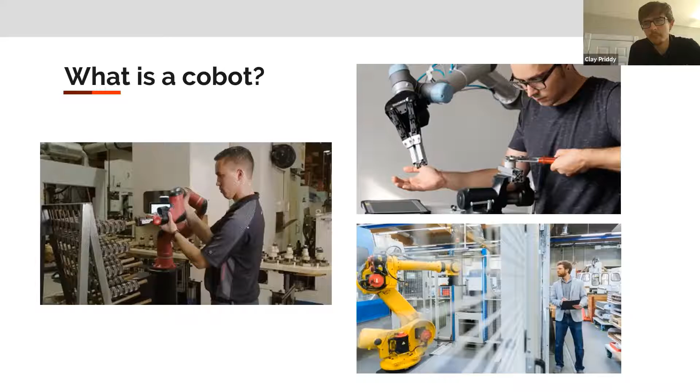The overall goal for our project is to help prepare the workforce in Kentucky to embrace this new technology. Other top universities in the United States have been doing research on collaborative robots, and we are hoping to bring this field of research to Western.

Our project is part of a larger collaborative robotics lab that will be in the Center for Energy Systems here at Western. This will allow our project to be used for research and education once we are finished with it. Additionally, our project is part of the NSF EPSCoR grant, and we are partnered with several other universities in Kentucky, united under the same goal of preparing the future workforce of Kentucky to use this new technology in the manufacturing industry.

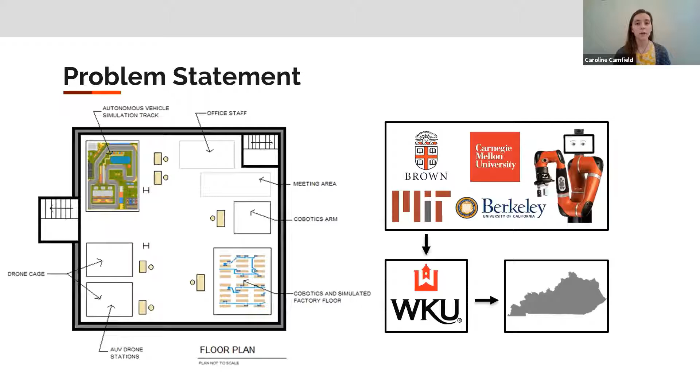The approach for this semester was a three-way path that were all parallel to each other. We wanted to do simulation, research, and robotic selection and purchase. This semester, with the current pandemic that is occurring, we have had to delay the purchase of the robot, and therefore we'll push it back to our next semester part of our project. We have completed all of our simulation and research up until this point, and next semester we will be developing perception as well as developing educational modules to teach the future workforce of Kentucky.

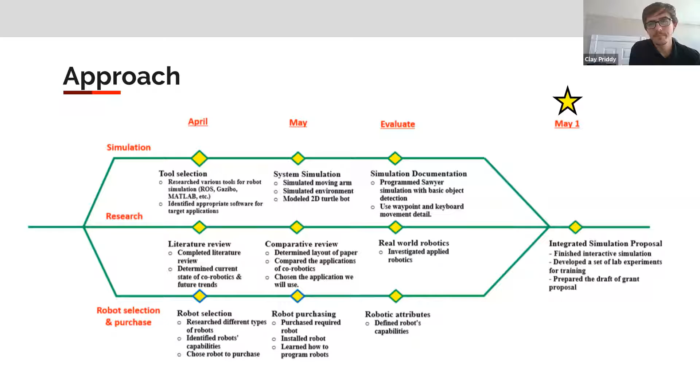One of the steps in our process was to select a robot, and to do so we used a decision matrix. Here we compared several different companies of robots as well as some basic criteria. From this analysis, we determined that the Sawyer and Universal robots ranked the highest, but since they were tied, we needed to do some more analysis in order to determine which one was better suited for our needs.

Taking upon a further analysis of the two, we talked to the companies that make the robots and found that Sawyer had more torque sensors, which will allow us to collect more data to help students better understand what is happening with the robot, as well as help with research in the future for different types of co-robotics. Therefore, we went with the Sawyer robot for our purchasing.

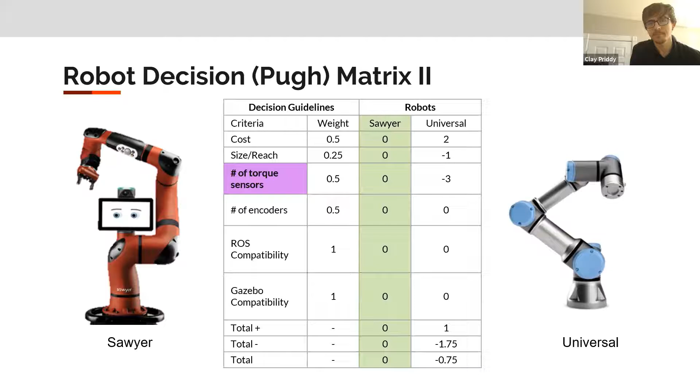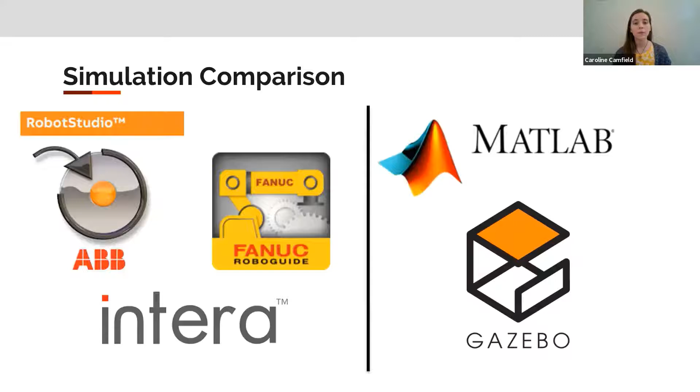We next looked at the different simulation softwares available to use for our robot. There are a few company-owned softwares as seen on the left of the screen, as well as some independently owned softwares as seen on the right. We decided to use the Gazebo simulation software as it is free, open source, and we've had some experience in the lab working with it.

There are two phases to our project. Phase 1 took place this semester and consisted of research and simulation. In the research portion of this phase, we determined what exactly a collaborative robot is, what applications exist, the different safety standards that govern a collaborative robot, as well as looked at the different research being done in the field. From this, we determined that collaborative robots are the future of the manufacturing, health, and agricultural industries.

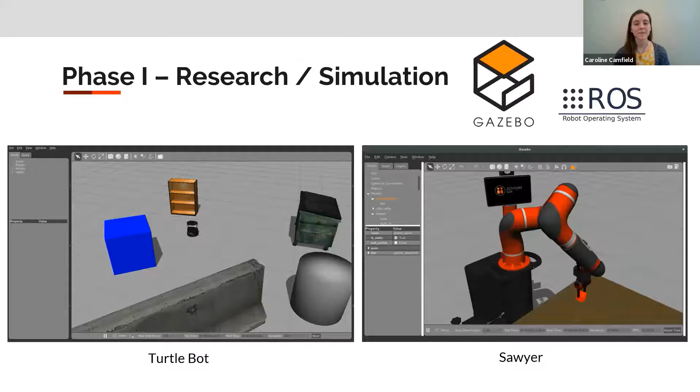Moving on to the simulation part of this phase, we decided to use the robot operating system ROS in the software Gazebo. The first simulation that we did was with the TurtleBot. Here we followed pre-made tutorials to lead the robot through basic manipulation and object detection. We then moved on to use the Sawyer simulation, where we were able to control the robot through keyboard commands as well as through waypoints.

Moving on to phase 2, we plan on next semester working to develop robotic perception. Robotic perception is the ability for the robot to understand its environment, the objects that are in its environment, as well as itself in the environment.

It would be able to identify what an object is based upon the shape of the object and to take action accordingly to what the object was. If it was a person, the robot would not go near it or the object in order not to cause harm.

We've already started working on this, as we've been able to take raw image footage and turn it into canny edge detection. This will allow us to send it through an image processing program that will let us identify an object based upon the edges that have been processed through our edge detection.

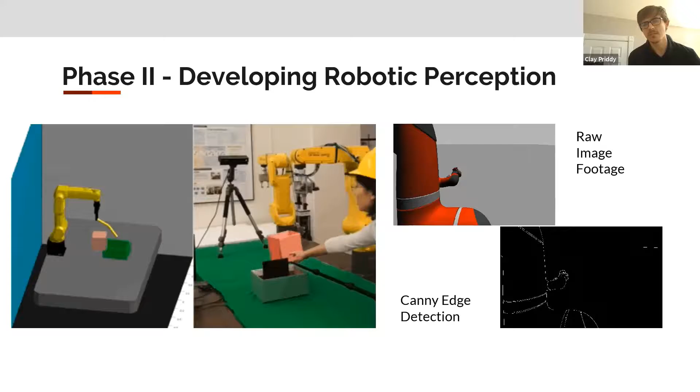Additionally, there are a few technical aspects to our project, one of which is how the simulation software actually moves the robot. This is called inverse kinematics, where the user inputs where they want the robot to go, and using this concept, the software determines the angles each joint on the robot needs to move in order to get to that location.

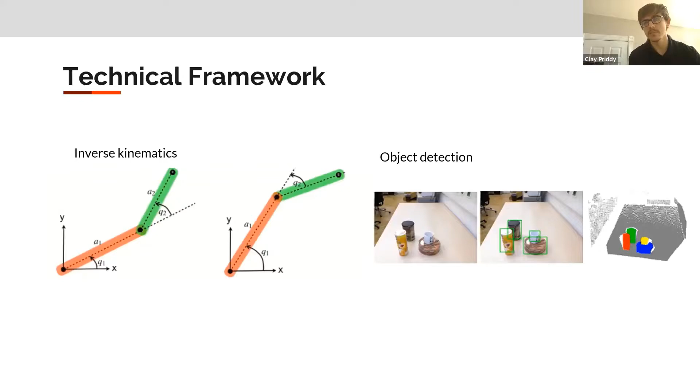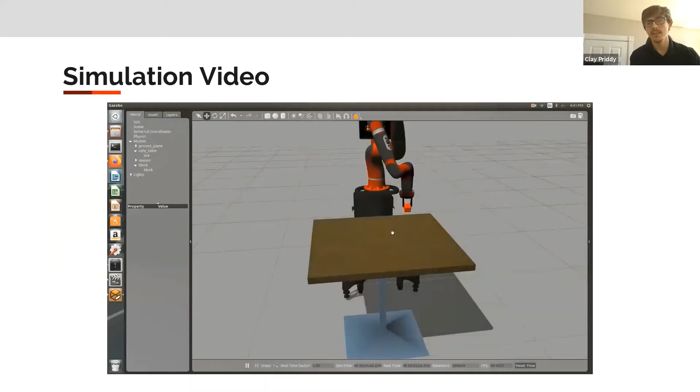In the second simulation video, we can see that the robot is doing waypoints. Waypoints are a known location that the robot needs to go. When the robot picked up the cube, it knew where the cube was as it identified that waypoint, picking it up and moving it to its secondary location.

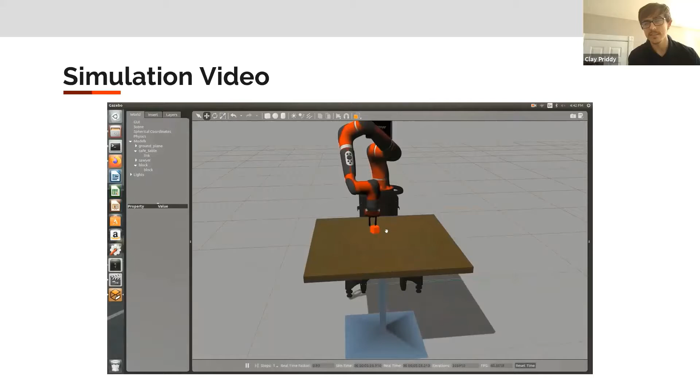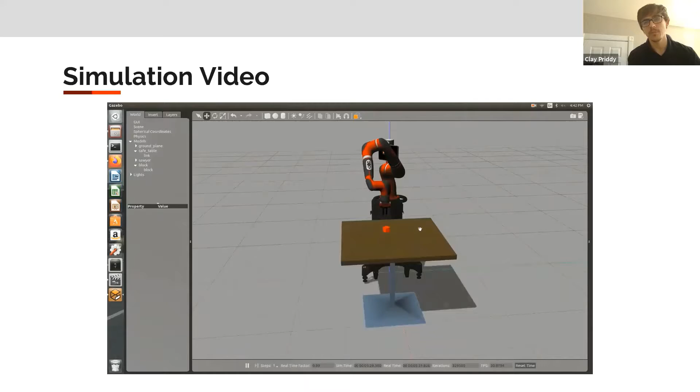At the secondary location, however, the cube had changed its angle, and the robot could not actually pick up the cube on its second attempt. This can be improved if we add object detection and perception, so it would identify that the cube has changed position and act accordingly to pick it up.

What's next for us? As we discussed, object detection is a huge thing we need to take on. We plan on taking what previous semesters have worked on, such as their object detection programs, and combining it with our edge detection to identify what those objects actually are.

With the coronavirus pandemic occurring right now, we are having issues actually obtaining a real robot. Therefore, simulations are going to be our primary way of working with the robot. This is not a problem, however, as the simulations are grounded in physics.

Similarly, we will also have to work on the floor plan and implementation of our robot next semester as well. Thank you.